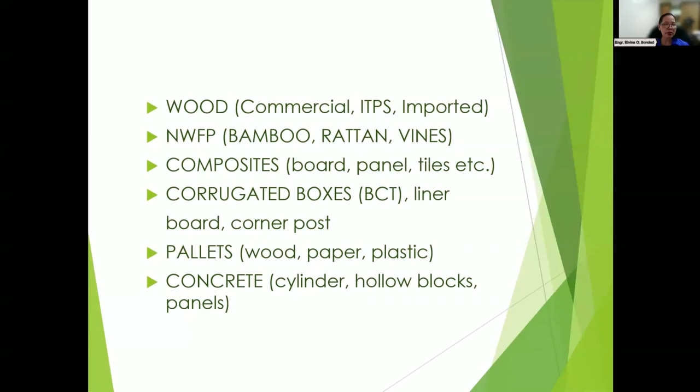We tested wood and non-wood forest products - bamboo, rattan, and vines, composite boards, panel tiles and others, corrugated boxes, liner board, corner posts; pallets - wood pallet, paper, plastic; and concrete - concrete cylinder, hollow blocks, and concrete panels.

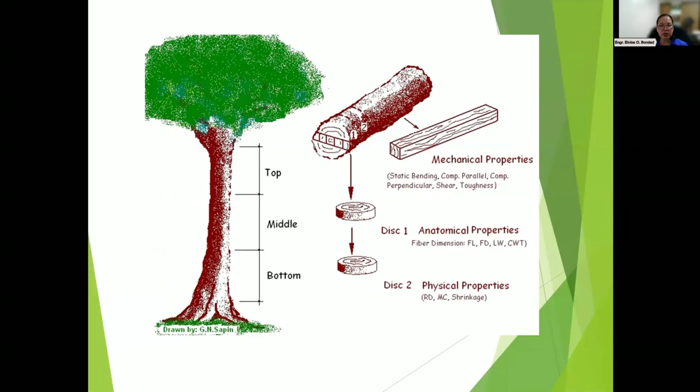This is the sampling scheme used in a project based on standard procedure - this for wood, and this sampling scheme was for bamboo. But for some clients, we advise them to provide us at least 3 samples for each test to have an average and make it conclusive.

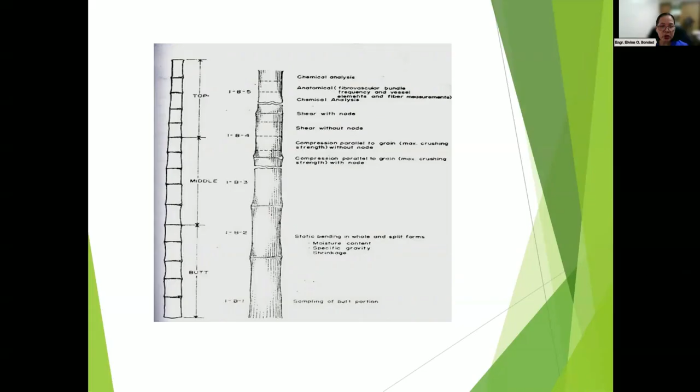On physical properties, we tested the moisture content, relative density, and shrinkage characteristics of wood and non-wood forest products. We also test the water absorption and thickness swelling.

Under physical properties, the moisture content is the amount of water present in wood. It affects many properties of wood, the fiber saturation point, and we also determine the equilibrium moisture content.

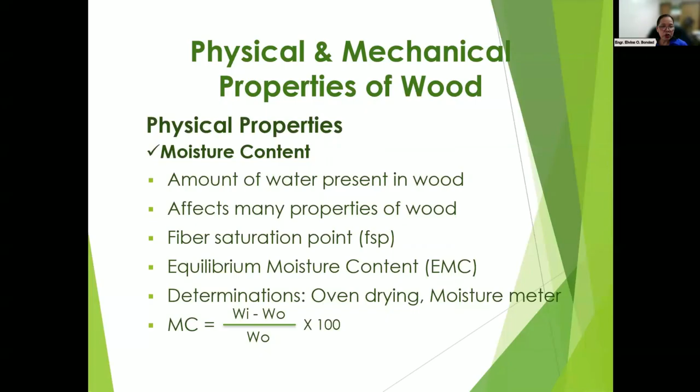We determine the moisture content with the oven drying method and the moisture meter. This is the formula for moisture content: weight initial minus weight oven dry, over weight oven dry, times 100.

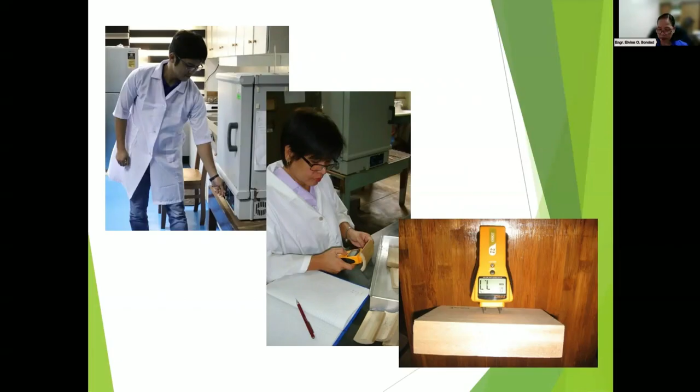Another physical property is the relative density, which is one of the best indices of strength properties of wood, aside from mechanical properties. It's a measure of the amount of cell wall substance in wood, and it's also a good indicator of many properties of wood.

So when relative density increases, the moisture content decreases. The relative density is the ratio of oven dry weight of wood to oven dry weight of an equal volume of water.

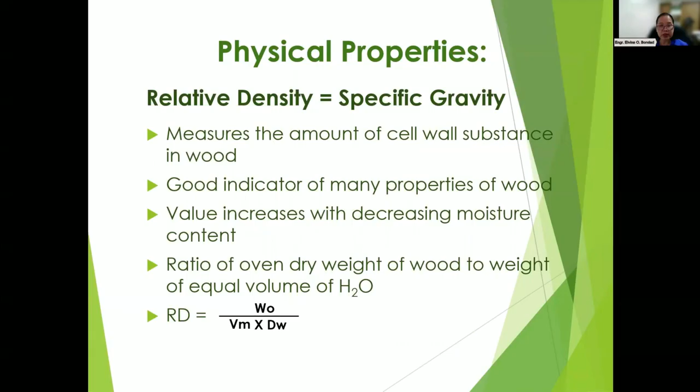Another physical property is the shrinkage characteristic determination. It indicates the dimensional change of wood and other materials when you season your samples.

The drying causes a decrease in moisture content, while soaking of samples in water causes an increase in water absorption. So reduction in dimension results from the loss of moisture below the fiber saturation point, which affects the quality of wooden products.

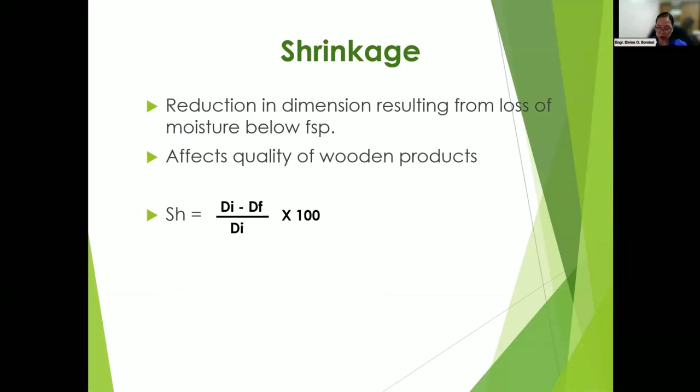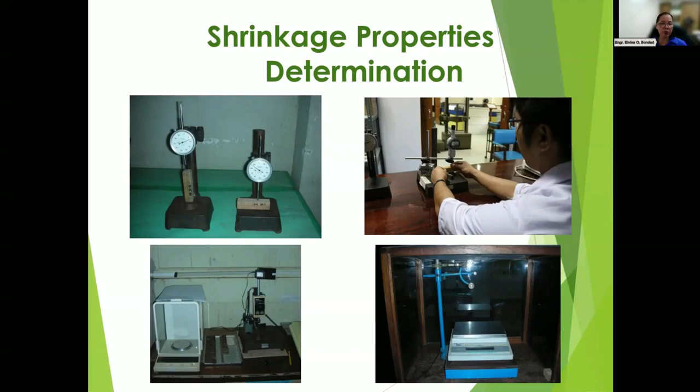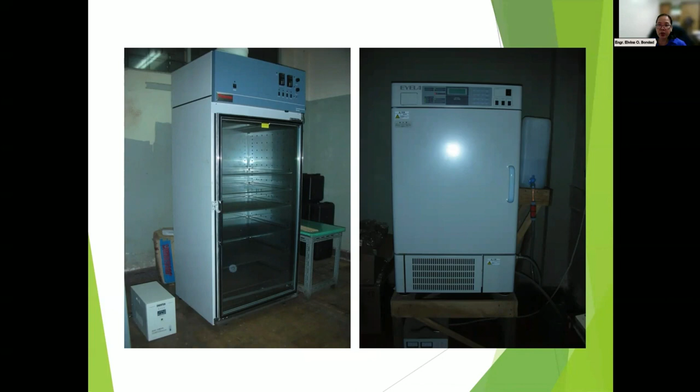In physical properties, we also use the humidity controlled cabinet to maintain the sample's condition at different levels of moisture content with temperature and relative humidity.

As stated earlier, we use ovens to get the moisture content from green to oven dry condition. We get the constant weight of the sample before the final weighing or recording of data.

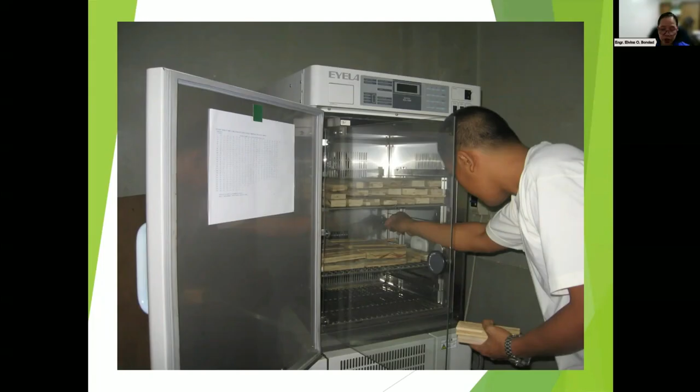Also an oven for the determination of shrinkage characteristic at different MC levels.

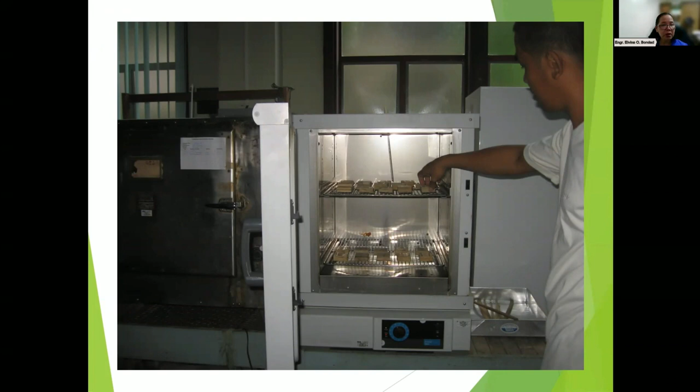For mechanical properties, we followed standard testing procedures like ASTM D143, standards for testing small clear specimens of timber. Also the ASTM D1037, standard test methods for evaluating properties of wood-based fiber and particle panel materials.

We also use different standards for different tests, like later on, some mechanical properties.

Equipment used in mechanical properties testing includes the following: a new 300 kilonewton capacity UTM, which is equal to 33 tons, with software.

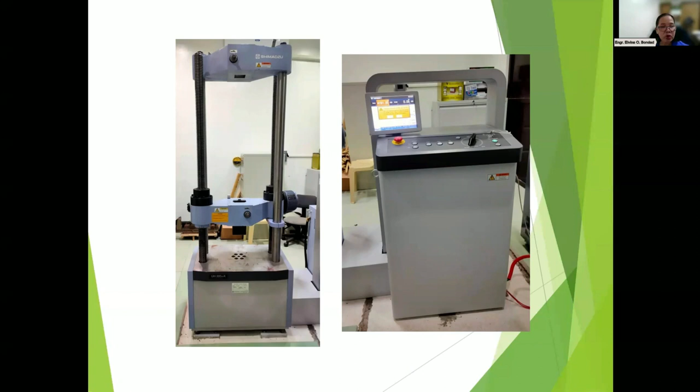We set the data, then we can easily get the mechanical properties, the modulus of elasticity, modulus of rupture - we get it from the software.

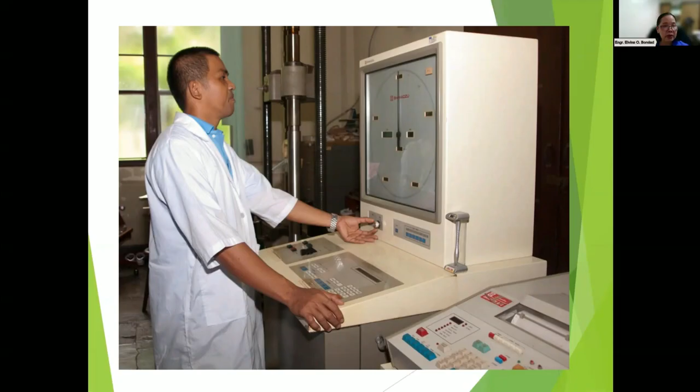It's also our old UTM with a load capacity of 10 tons. It is the oldest UTM used for bigger capacity specimens like panel board, beams, concrete materials, pallets.

Also used in the testing of cylinder hollow blocks - it has a 200,000 pounds load capacity, which is equal to 100 tons.

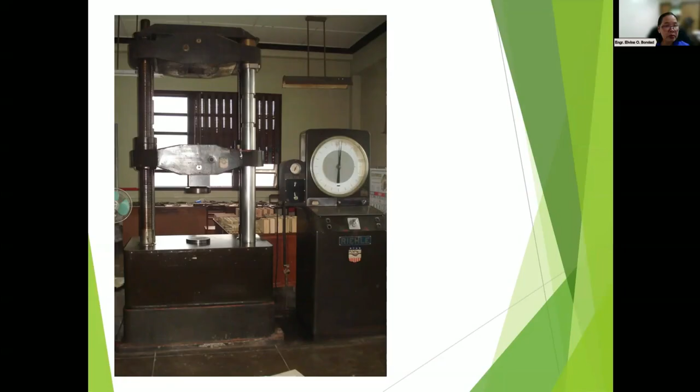Under mechanical properties, we tested the following: static bending, compression strength, compression parallel and compression perpendicular to grain, shearing strength, hardness, toughness, nail and screw withdrawal, and tensile strength. We'll discuss them one by one.

For static bending, it measures the flexural capability of wood. It determines fitness for use as beams, rafters, stringers, girders, floor joists, scaffolds, and platforms.

The MOE, which is the modulus of elasticity, is the ability of a material to recover its original shape and size after stress is removed.

Stress at proportional limit is the point of non-recoverable deformation. MOR is the modulus of rupture, which is the load required to cause failure in bending.

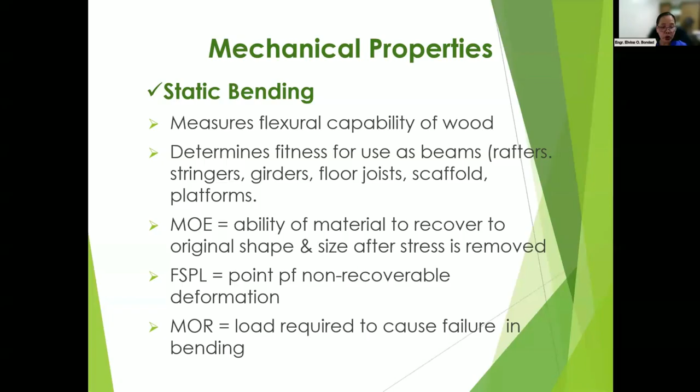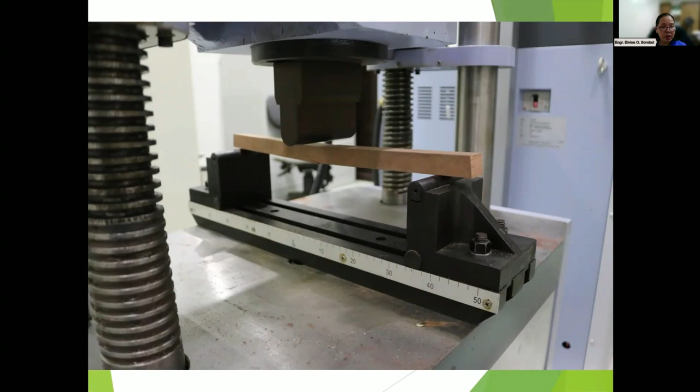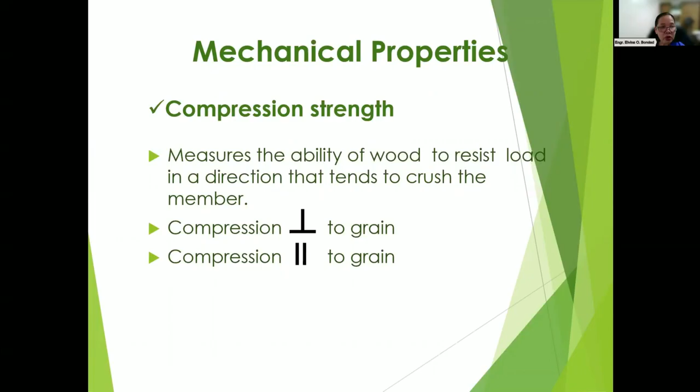Also the setup for static bending. Compressive strength is also one of the mechanical properties. It measures the ability of wood to resist load in a direction that tends to crush the member. We have compression parallel to grain and compression perpendicular to grain. This is the setup for compression parallel to grain, and then the other one is compression perpendicular to grain.

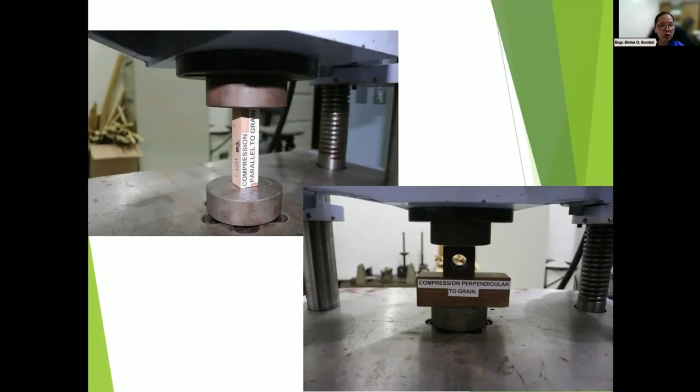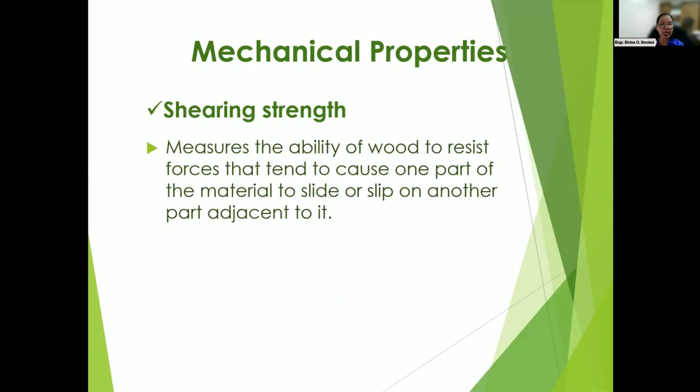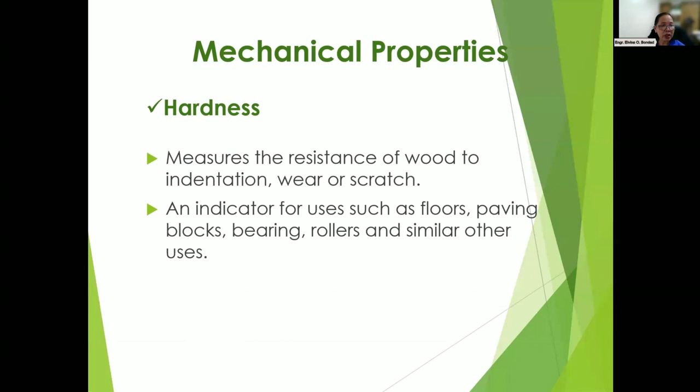Another mechanical property is hardness, which measures the resistance of wood to indentation, wear, or scratch. It's an indicator for uses as floors, paving blocks, bearing rollers, and similar uses. So we have specific kinds of wood to be used as floor. With the hardness determination, we can tell if it will indent at once, so it's soft or hard.

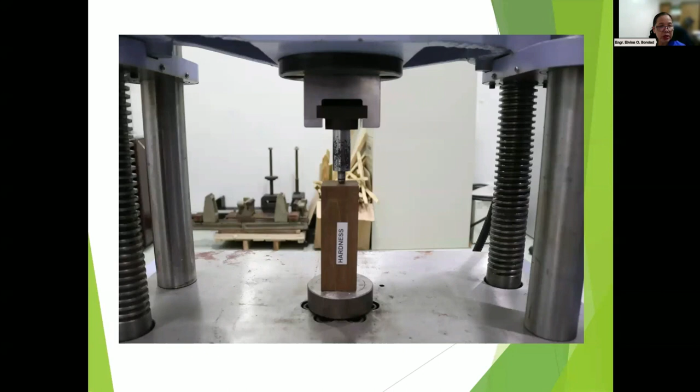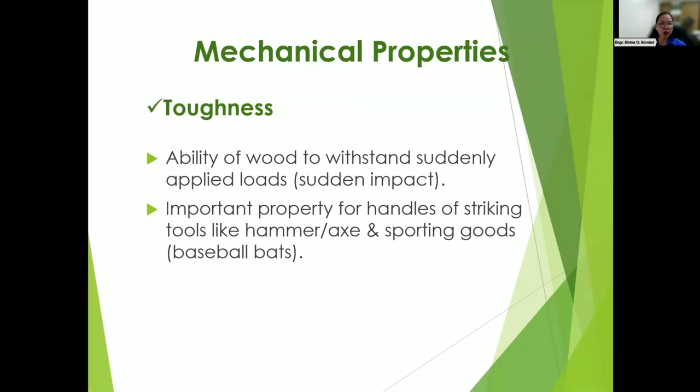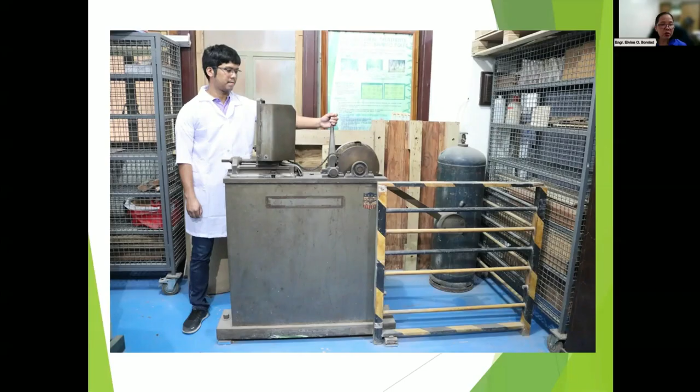Another test for mechanical properties is toughness, which is the ability of wood to withstand suddenly applied loads, or sudden impact. It's an important property for handles of striking tools like hammer, axe, and sporting goods like baseball bats. This is our old toughness machine. We also have a standard procedure for that.

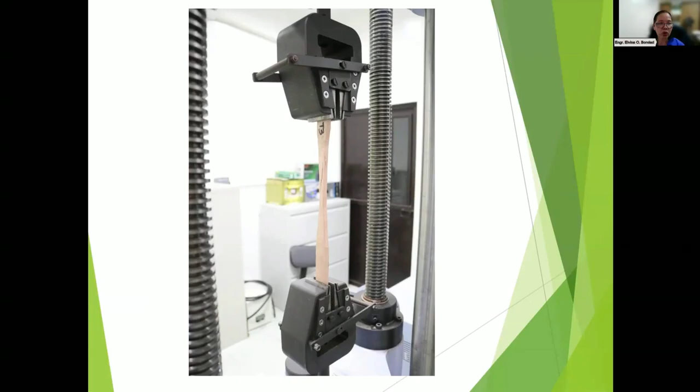Strict adherence to the strength class limits is maintained in assigning species to a certain group. The properties considered in grouping the species are modulus of rupture and modulus of elasticity in static bending, maximum crushing strength in compression parallel to grain, shearing strength, and relative density.

Since species within a group can substitute for each other, the strength grouping of Philippine timbers can guide producers, manufacturers, traders, and wood users in evaluating and selecting the appropriate species for a particular end use. The system is envisioned to promote the rational utilization and marketing of an array of lesser-known and plantation-grown species in the market. On the other hand, engineers, architects, and builders can rely on this strength grouping to simplify their designs and specifications in construction.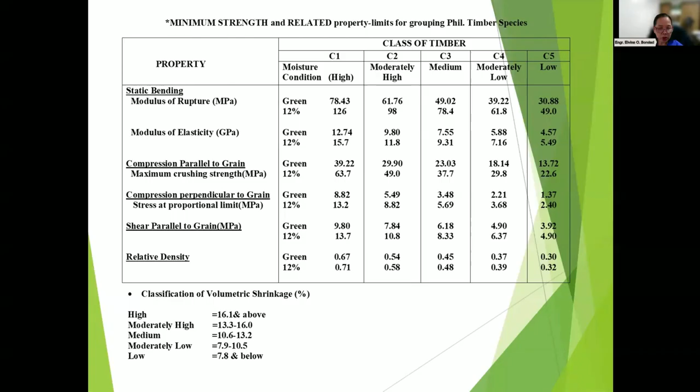For other tests, there are pallets. We also test pallets, and we are also doing some accreditation or preparing for the accreditation of a pallet testing center.

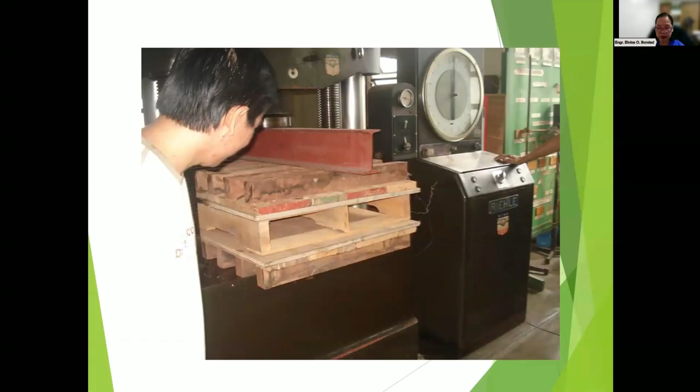We tested the pallet compression and bending. We also test in their plants using manual testing because our machines have dimension limitations and cannot test bigger sizes. So we actually do it at their plants.

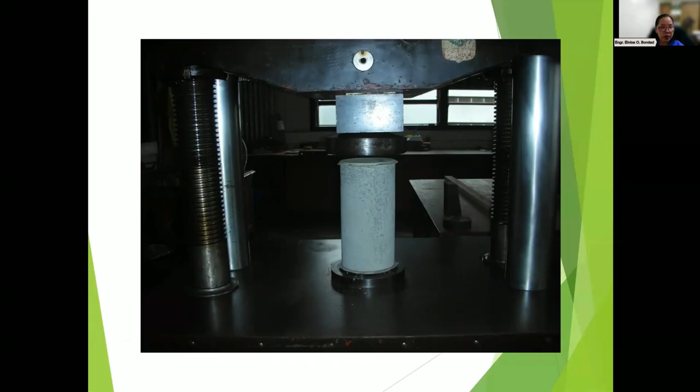We also test concrete cylinders requested mostly by the National Housing Authority or construction companies. The concrete cylinder test also uses other standards.

We also test hollow blocks. And also the concrete panels, which are mostly used on walls or other dividers.

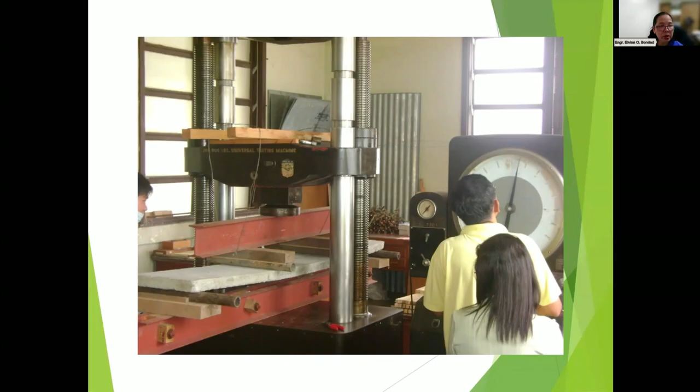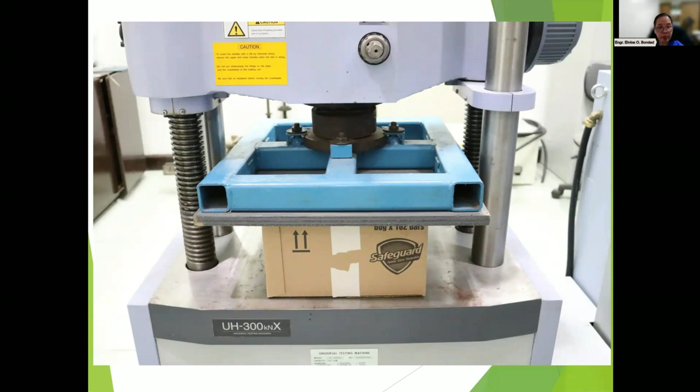We also test boxes, the box compression test used by different industries for their products, to determine what load the box can carry. You get the maximum load.

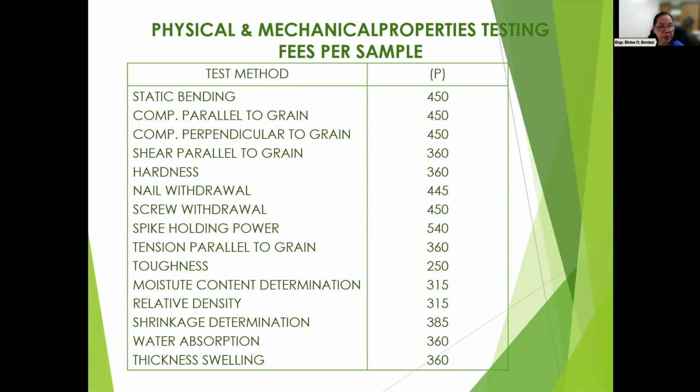In physical and mechanical property testing, we have a testing fee per sample stated in this table. You can inquire with us when you have a project to be tested, regarding the minimum testing fee. So we have testing fees for other test methods.